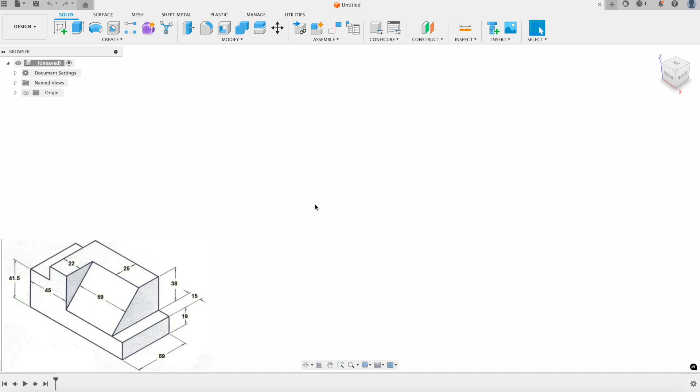To create this shape, I'm going to start the same way I did last time. I'll start by creating a sketch, and again I've got my 3 work planes here. I'm going to start by just looking at the top view, so I'll click on the top view again.

Looking at this rectangle shape, something that helps me is starting with one big rectangle that encompasses the entire part. So I'll take my rectangle tool, press R on my keyboard to grab it, start at my origin, which is always good practice, and then get my dimensions for my rectangle.

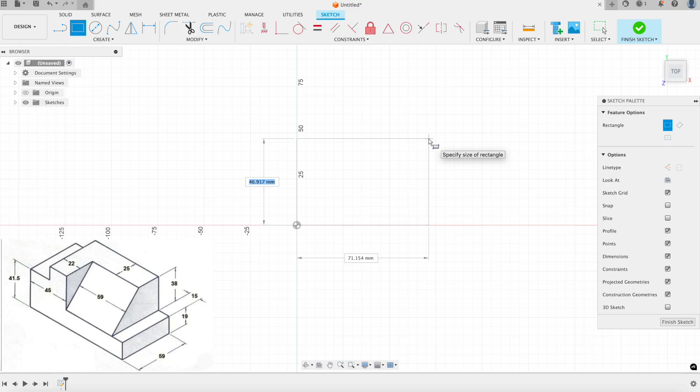The entire length of my rectangle, we can do a little math here to figure this out, but I'll start with this highlighted dimension, which gives me 59. For the bottom part of my rectangle, there are 3 dimensions given to me: from the left to the very front lip of that slope is 45, the length of the slope itself is 59, and that tiny edge on the side is 15.

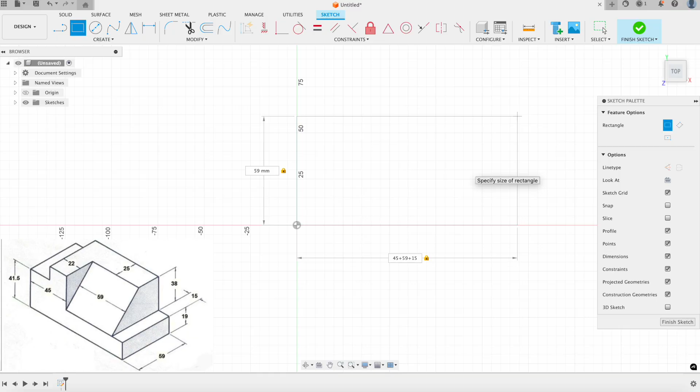I could do all that math in my head, but Fusion has a handy feature where the dimensioning tool actually has a calculator built into it. So I could type 45 plus 59 plus 15 and press enter, and Fusion gives me the exact dimension I need of 119. That's just a way you can save yourself some time using this software.

I see I've got my rectangle, and I want to do something similar to what I did with that last shape. I want to start with some lines roughly placed where I want them to go, and then come back in and add any necessary dimensions. For this one, I'm going to start by just drawing the lines that go vertically here. I'm not going to worry about this L-looking shape down there yet, I'll come back and do that second, and you'll see what I mean in a minute.

We're going to start with just these lines that go from all the way at the top of the rectangle to all the way to the bottom. So boom, boom, boom, and then we've got one more that's way over here.

Looking at my picture here, I see I don't necessarily know all the information about the dimensions, but I do know enough to be able to put in all the dimensions I need to get my sketch fully constrained.

So I'm going to start by grabbing my dimension tool, and again I can press D on the keyboard to do that. Then I see that from this edge to the very edge of my part is 45 millimeters. So I'll click on this edge, then click on that far left edge, and click one more time off to the top there and make that 45.

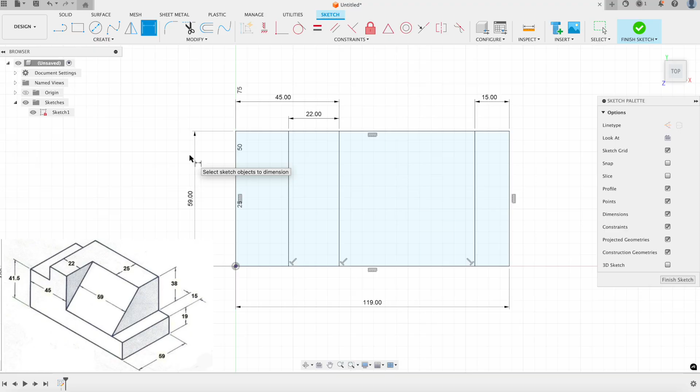From there, I'm going to finish my sketch, and then I'm going to start extruding. To do this, I'll just click on my extrude feature and click on some of my shapes here.

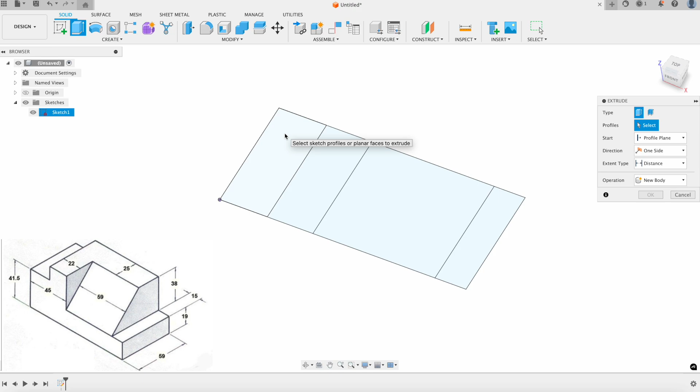This leftmost edge of my shape goes up by 41.5. So I'm just going to click extrude, click on that left edge, and then go 41.5. And again my sketch disappears, so I've got to go back over here to the left-hand side of the browser and reveal my sketch again.

Okay, this far right edge goes up by 19. So I'm going to go ahead and do that, click on this far right edge and click on 19.

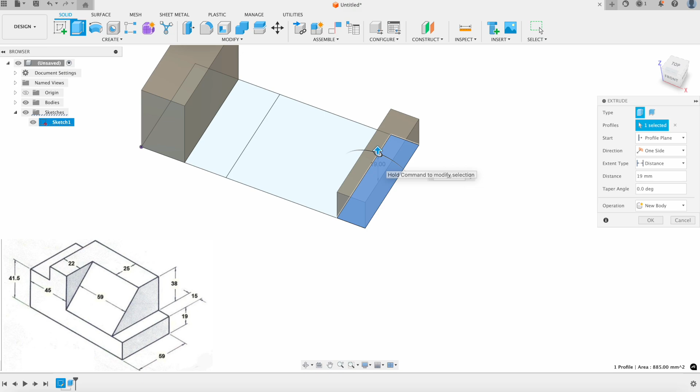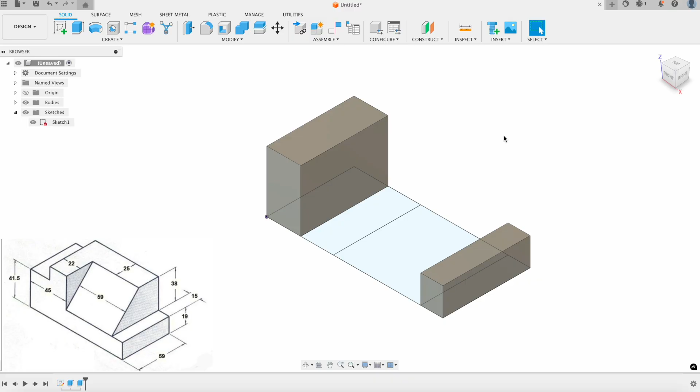Okay, now this middle portion, right? Again, we could do the math in our head, but we could also just use that Fusion calculator to find out exactly how much we need to extrude it by. Because if we look at this shape from our home view, we see that this edge is given as 19, and we need to bring this up from this ledge 38 more millimeters. So we could click on extrude, click on these two squares because both of them go up to the same height, and then we could do that 19 plus 38 and then press enter.

All right, so now we're almost there. We're just about done with our sketch. Okay, the last thing that we need to do is kind of cut away at our shape here to get that little slope that we see.

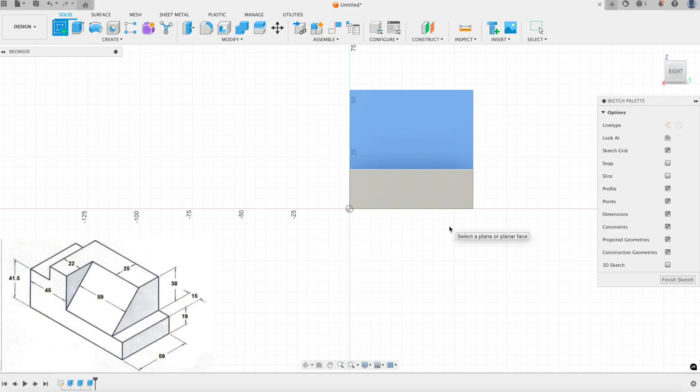So to do this, we can actually create an additional sketch on the 3D geometry that we've already created. So let me show you what I mean. If I click on Create Sketch, and then I click on this very side face here, this right side face, I'm now drawing a sketch right on this rectangle that I already have.

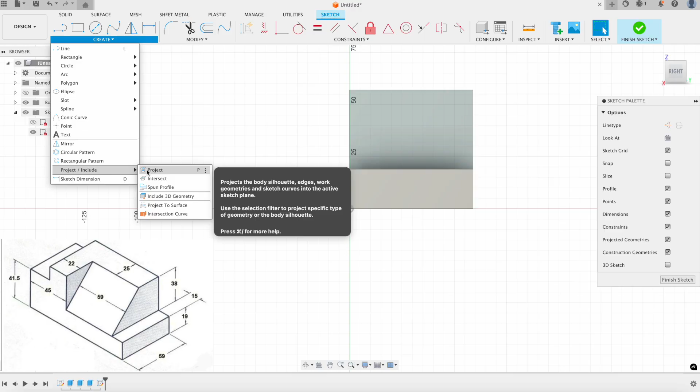Now, what I want to do is make it so that I can actually reference this rectangle. So to do this, I want to go down to Create and down to Project. Project is a very handy tool. It takes any sort of 3D object that you already have, and allows you to create dimensions referencing that already made geometry. If I click on Project, or just press the P key, then click on this side face right here and click OK, now you'll see these purple lines pop up. These purple lines mean that they are just referencing that already created shape.

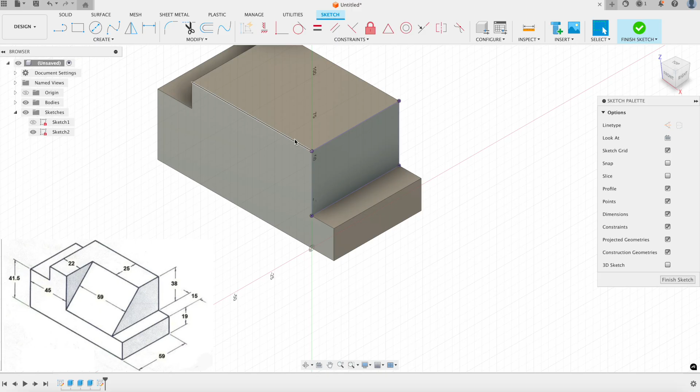And then from there, what I want to do is cut out just this little slope from here. If I was to look at this from my home view, what I need to do is add a line that goes from here to here and then cut that material away so I have my slope. So to do this, I'm going to use my line tool. I'm going to start in the bottom left of my projected sketch there, so I'll click there and then go all the way up until I make contact with the top portion of it.

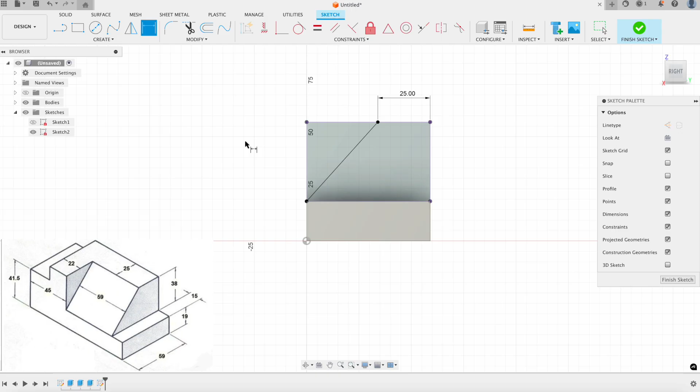And then what I can do is take my dimension tool, so I'll press D for my dimension tool. And since I started in this corner, this part of the sketch is actually already fully constrained. The only thing I need to do is give a dimension from this point to the very top of my line. According to my picture, that is going to be 25 millimeters away. So if I click 25 and then enter, now you'll see my second sketch is also fully constrained. So we'll go ahead and click Finish Sketch.

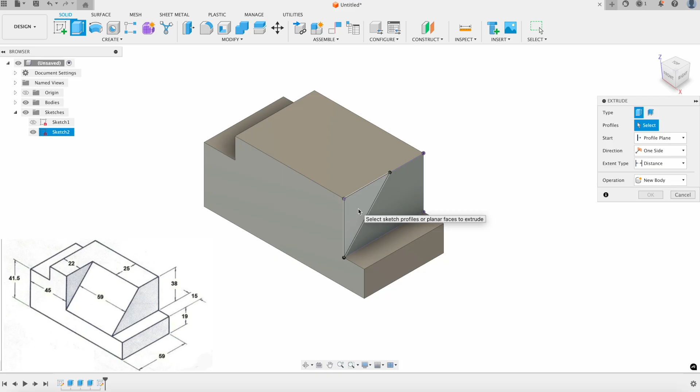And now what I can do is extrude away this material. So as before where we were extruding to create material, now we're going to extrude to remove material. So I'm going to click on Extrude and then click on this little part of the triangle that I want to cut away. If I click on that, you'll see that in the picture it shows that this slope needs to go this way about 59 millimeters.

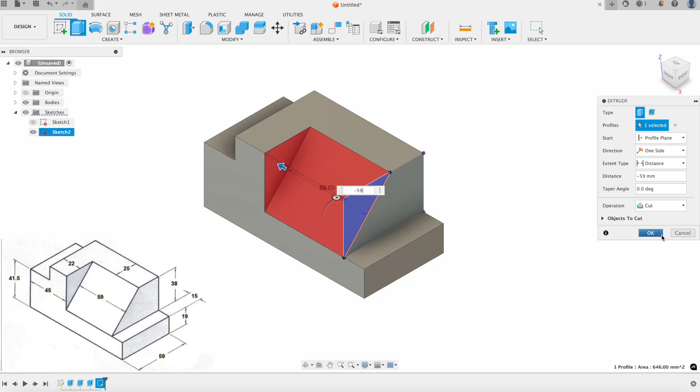To take away material, you just add a negative sign to your extrusion depth. So instead of 59 millimeters, I would type negative 59, and you'll see that it turns that shape red, meaning it's going to cut away at your material. And you could see on the right side in this operation, it'll tell you what it's going to do - this is going to cut away by 59 millimeters. And I'll click OK. And that's it.

Now I have my second shape. So there I used the Sketch and Extrude tool to create my 2D sketch, extrude it up to a 3D height and create material, and then also remove some of the material that I didn't need fully.